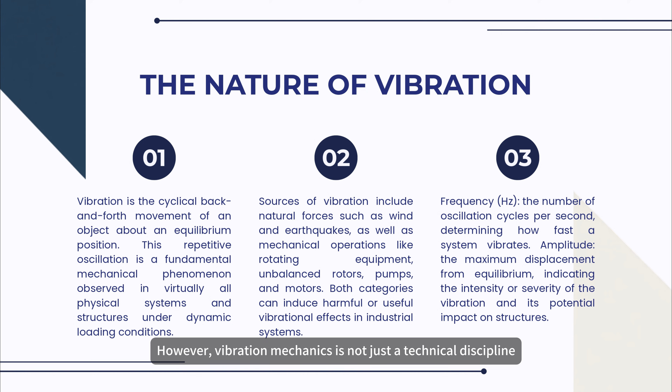However, vibration mechanics is not just a technical discipline. It is a gateway to sustainable industrial practice.

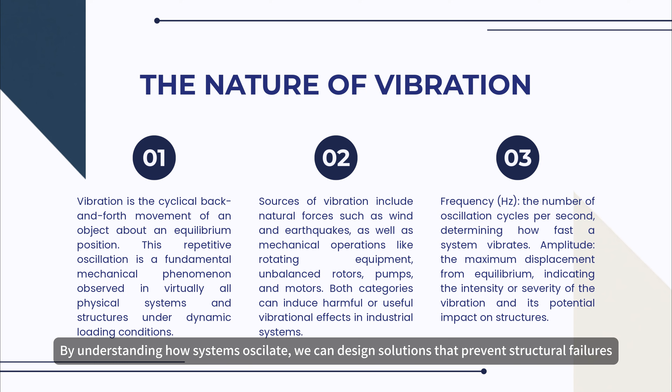By understanding how systems oscillate, we can design solutions that prevent structural failures, extend the lifespan of critical machinery, and reduce energy waste. This means that integrating vibration knowledge leads directly to a cleaner and more efficient industry.

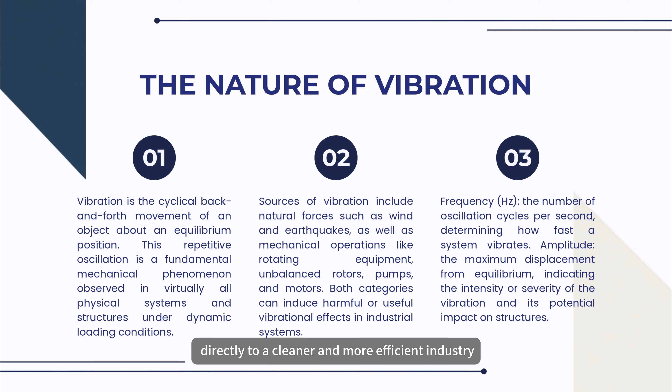To understand why mitigation is so important, we must look at the dangers of resonance. Resonance occurs when an external force frequency perfectly matches a structure's natural frequency. When this happens, the amplitude spikes and vibration grows uncontrollably.

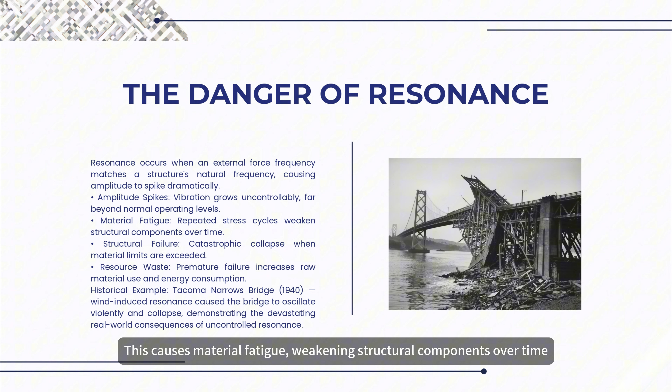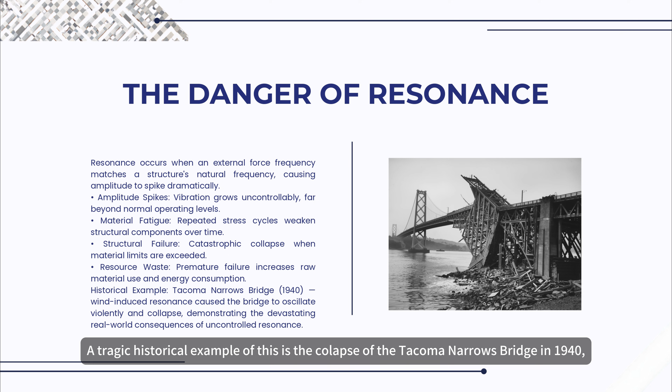This causes material fatigue, weakening structural components over time, and can lead to catastrophic structural failure. A tragic historical example of this is the collapse of the Tacoma Narrows Bridge in 1940, which was destroyed by wind-induced resonance.

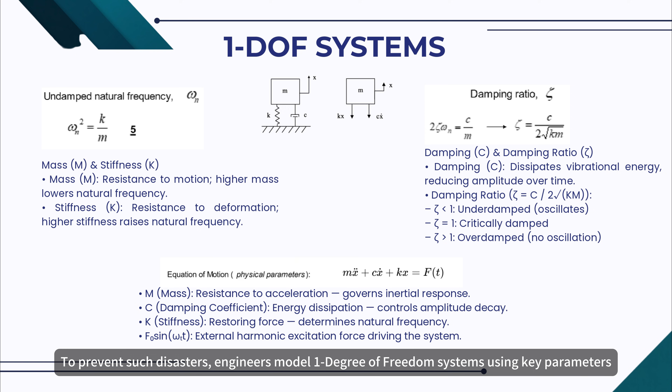To prevent such disasters, engineers model a 1-degree-of-freedom system using key parameters like mass, m, and stiffness, k. These parameters determine the natural frequency through the formula omega n equals square root of k over m.

Damping, characterized by the damping ratio, dissipates vibrational energy. The damping ratio is calculated as zeta equals c over 2 times the square root of k times m. A ratio less than 1 is underdamped, equal to 1 is critically damped, and greater than 1 is overdamped.

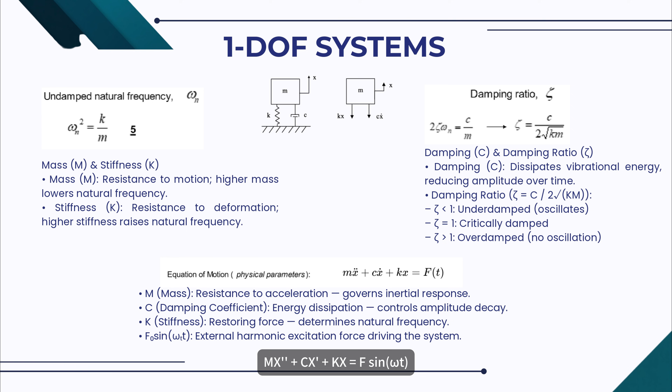Optimal damping minimizes resonance risk and energy waste. The behavior of this system is guided by the equation of motion: m x double dot plus c x dot plus k x equals F sine omega t.

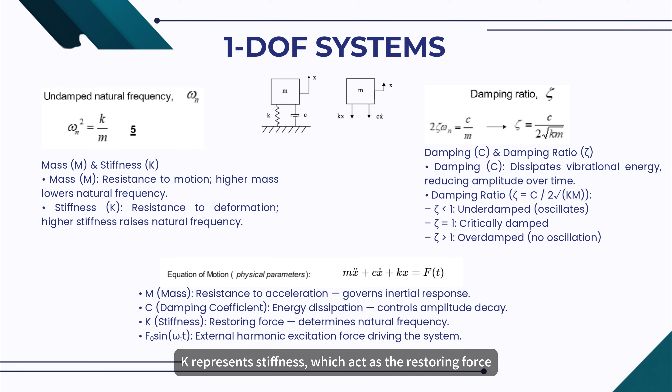Here, m represents mass, providing resistance to acceleration; k represents stiffness, which acts as the restoring force; and c is the damping coefficient, which controls energy dissipation and amplitude decay.

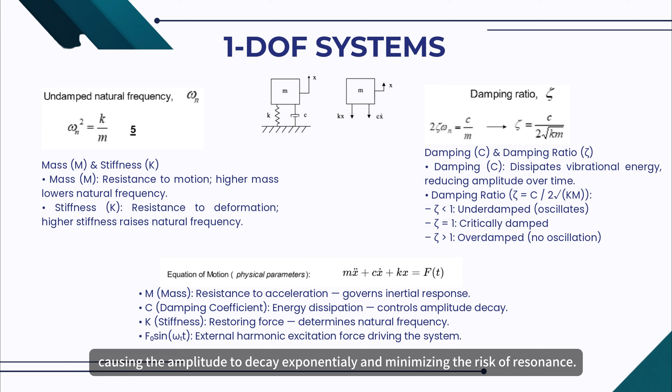By utilizing damping, we can dissipate vibrational energy over time, causing the amplitude to decay exponentially and minimizing the risk of resonance. In industrial settings, machinery is consistently subjected to sources of excitation, such as rotating unbalance in motors or harmonic force from stamping presses.

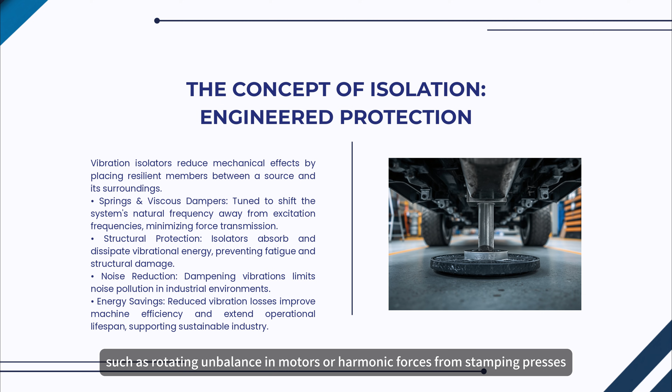This is where the concept of engineering isolation becomes critical.

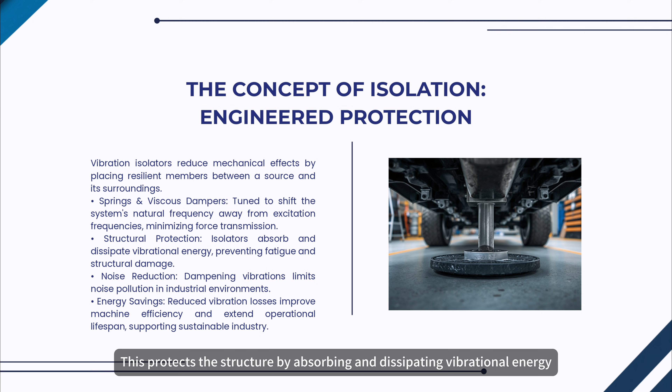Vibration isolators, like springs and viscous dampers, are placed between a source and its surroundings to shift the system's natural frequency away from excitation frequencies. This protects the structure by absorbing and dissipating vibration energy, which also significantly limits noise pollution in industrial environments.

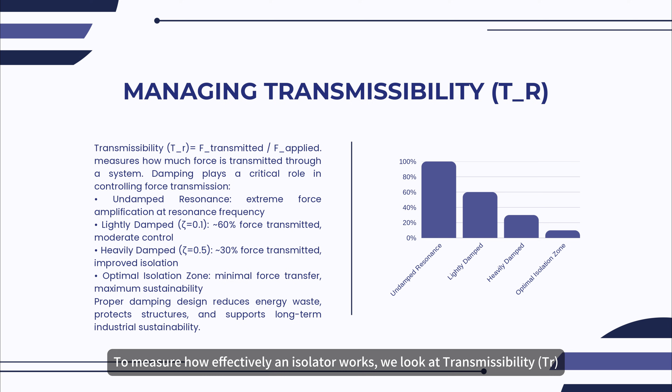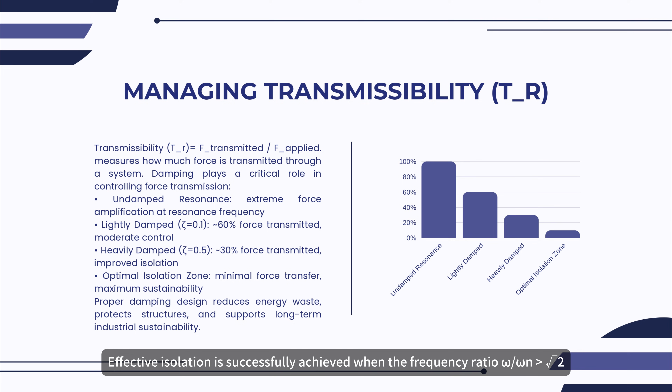To measure how effectively an isolator works, we look at transmissibility, TR, which is the ratio of F transmitted to F applied. Effective isolation is successfully achieved when the frequency ratio, omega over omega n, is greater than the square root of 2, dropping TR below 1.

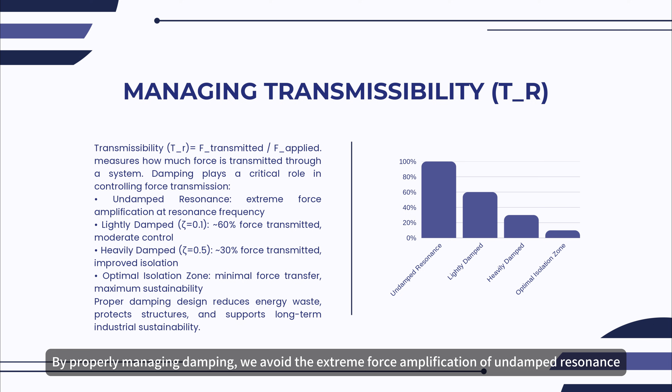By properly managing damping, we avoid the extreme force amplification of undamped resonance and keep the system in the optimal isolation zone.

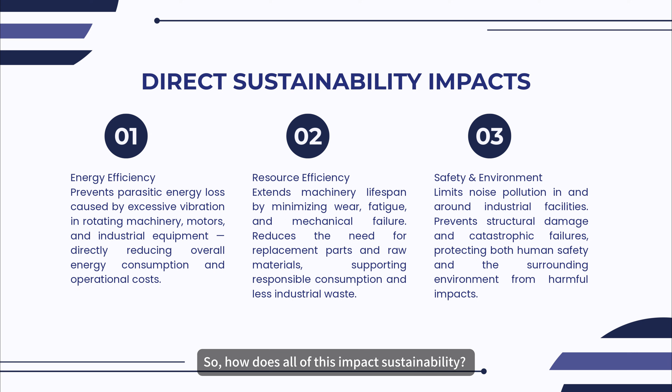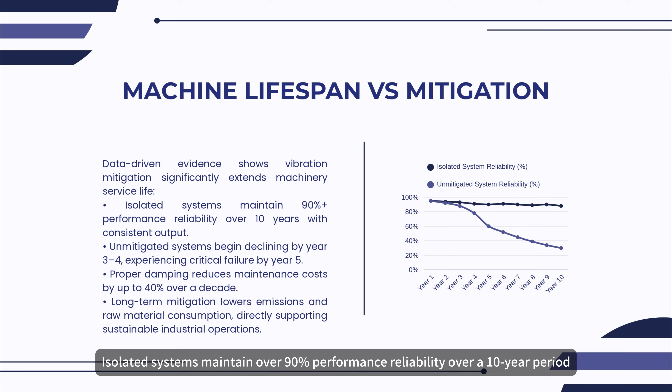So how does all of this impact sustainability? The data is clear: proper vibration mitigation significantly extends machinery service life. Isolated systems maintain over 90% performance reliability over a 10-year period.

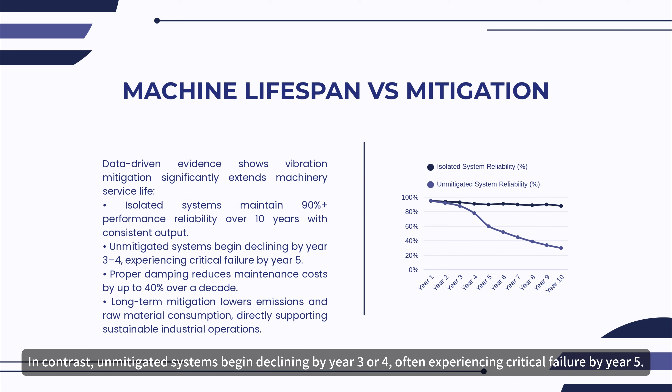In contrast, unmitigated systems begin declining by year 3 or 4, often experiencing critical failure by year 5. Implementing proper damping reduces maintenance costs by up to 40% over a decade.

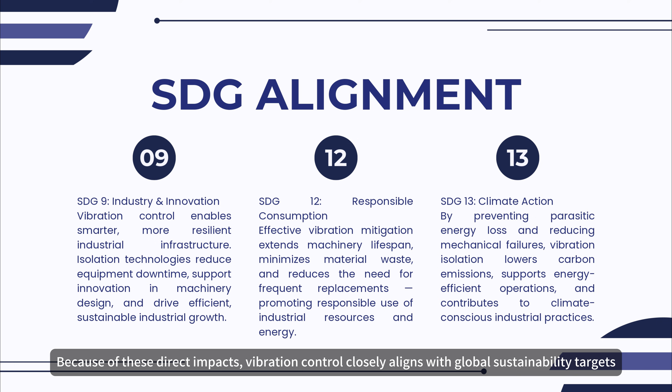Because of this direct impact, vibration control closely aligns with global sustainability targets. It supports SDG 9, Industry and Innovation, by enabling smarter, more resilient industrial infrastructure.

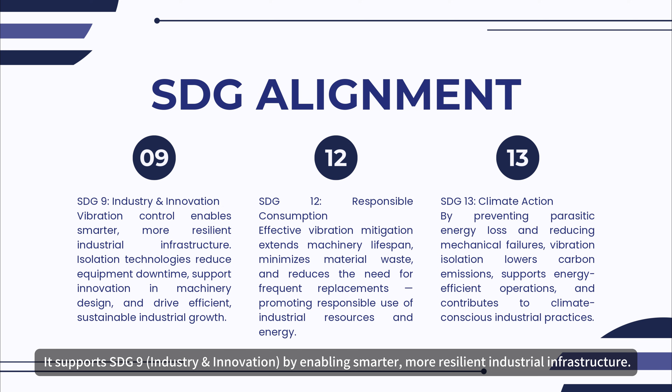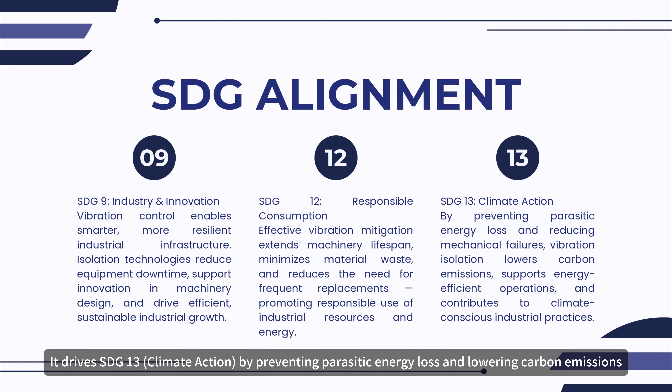It aligns with SDG 12, Responsible Consumption, by extending machinery lifespan and minimizing material waste. It drives SDG 13, Climate Action, by preventing parasitic energy loss and lowering carbon emissions.

To close, we must recognize that vibration isolation is not merely an option for comfort. It is a fundamental engineering necessity. The future of sustainable industry is built on the science of vibration, engineered for people, the planet, and progress. Thank you.